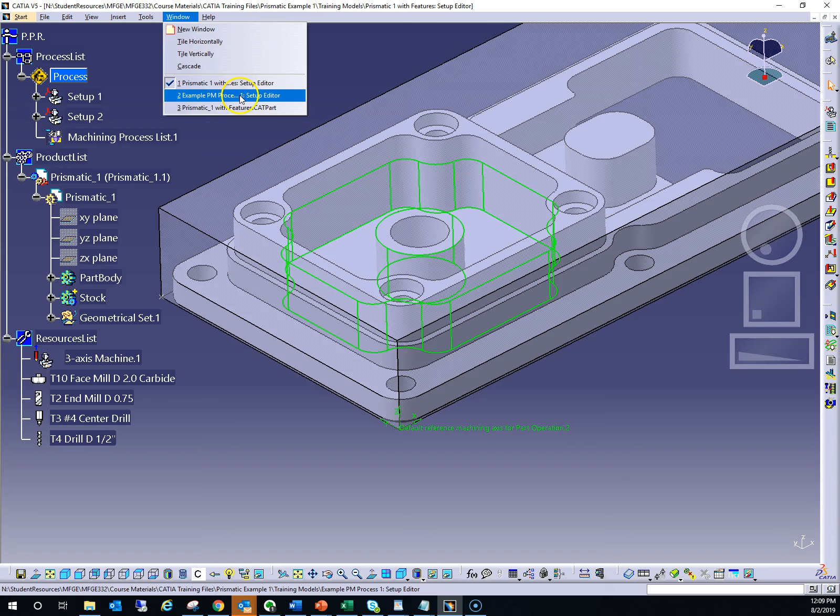So, as I did with the profiling and facing operation, I'm going to let you take a crack at that first, and once you're done, you can come back and follow along to see what I've done. There are a few things I'll show you that will help speed things up. So please go ahead and start working on that second pocket.

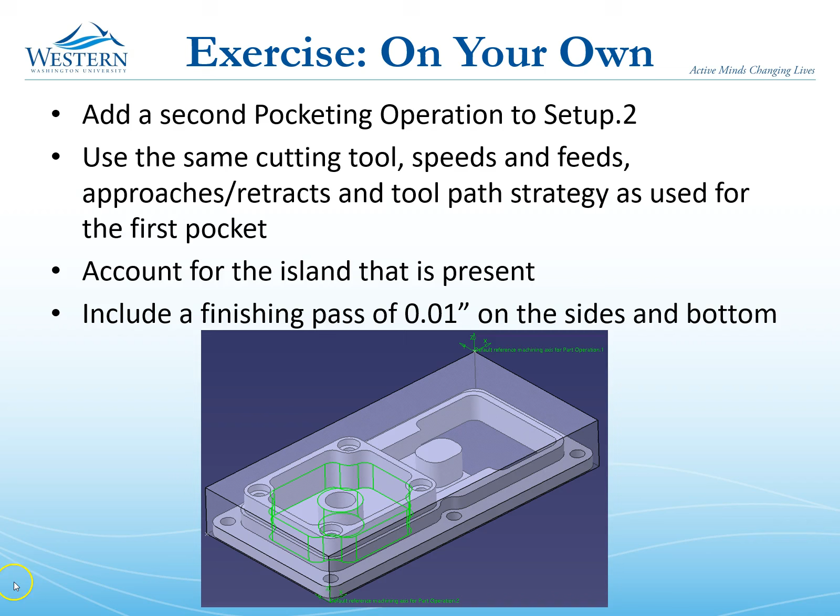Okay, I hope that went well. So I'm going to go ahead and do the second pocket. I'm going to show you a few tricks that you'll probably be upset I didn't show you before, just to speed things up. One thing you can do is copy operations.

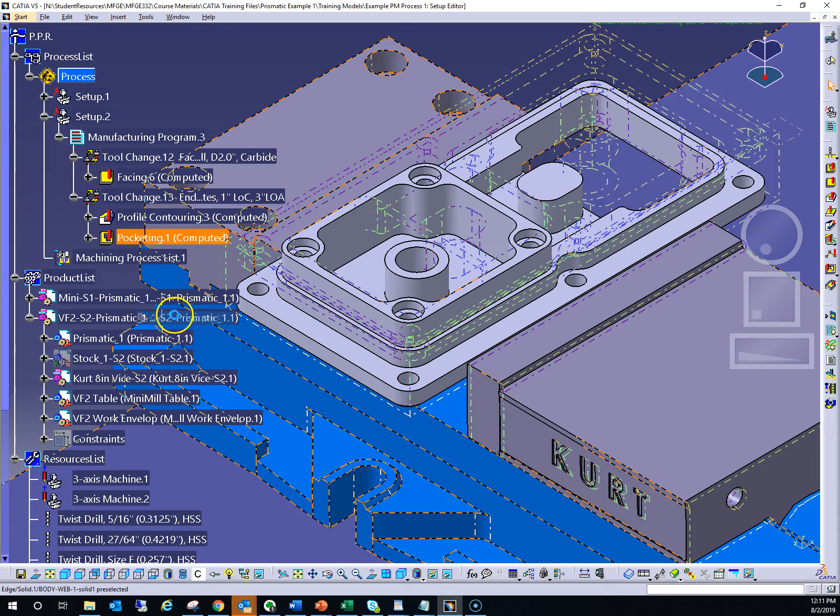So we have a pocketing operation here. Let's go ahead and right click and copy, then paste it right below. If I highlight, paste, I now have a second pocketing operation. Obviously it's exactly the same as the first right now, but it gives me something to modify.

So rather than building a pocketing operation from scratch, I can go ahead and modify an old one. In this case, because that pocket is directly below the one above it and uses a lot of the same geometry, I save a lot of time approaching it this way.

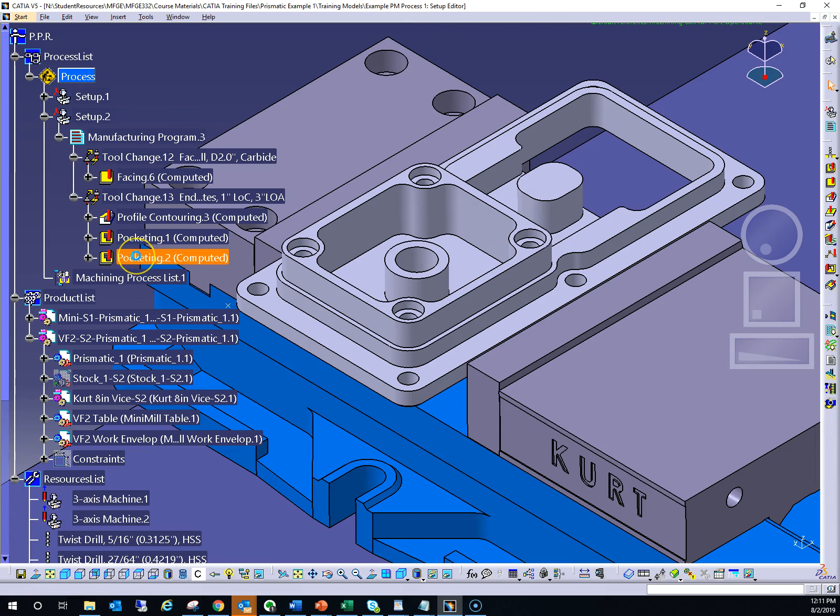So let's go ahead and double click on the copy, and go to our geometry tab. So what is different in the geometry tab? Well, there are a few things that are different.

First of all, the top of the second pocket is really the bottom of the first pocket, so we have to change that. And also the bottom is no longer the top of the island here—it's actually the bottom as we see it here.

So let's go ahead, right click remove, and reselect the top. Then I'm going to right click remove, and reselect the bottom.

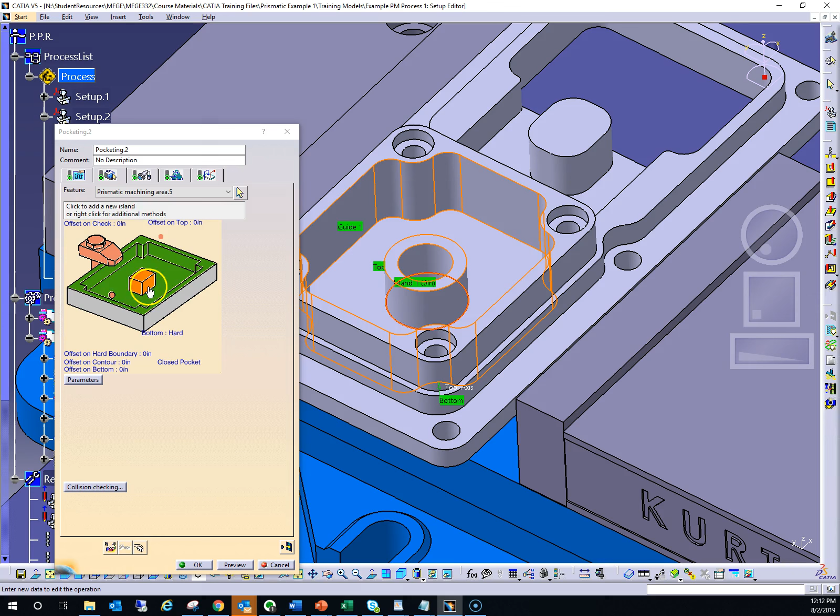Now notice that in reselecting the bottom, it also selected the island, which may actually be correct in this case. It says an island here has been picked, island 1. So we've solved that problem too, the problem of selecting the island, by reselecting the bottom.

So we're done with our geometry. Let's move over to our tool. We shouldn't have to change anything here since we just copied the previous pocketing operation, nor should we have to change anything with our speeds and feeds.

With regards to the retracts, again, since we copied the operation, everything that we set previously is as it was there. We may need to come in and play around with some of the ones that haven't been set, but let's generate the toolpaths first and look at it before we start doing that.

For our toolpath strategy, we're going to stick with what we've defined for the first pocketing operation. So outward helical, we're going to use the same radial step over strategy, 25% overlap. Axial, we're going to go down 50 thousandths, so to 21 levels.

For finishing, this is one place where we do have to change, because we do want to finish the side for sure, but we also want to finish the bottom in this case. So let's switch this from side finish last level to side finish at last level and bottom, and we're going to leave 10 thousandths on the bottom for finishing.

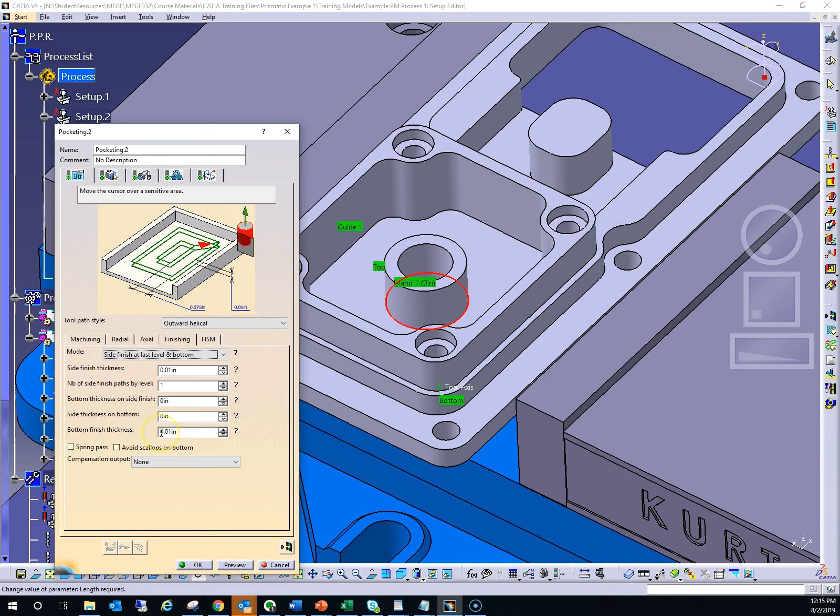Let's go ahead and generate the toolpaths and see what we've got. We should expect to see that we are machining around this island, which is correct, and we are machining from the top here, the top of the island, down to the bottom.

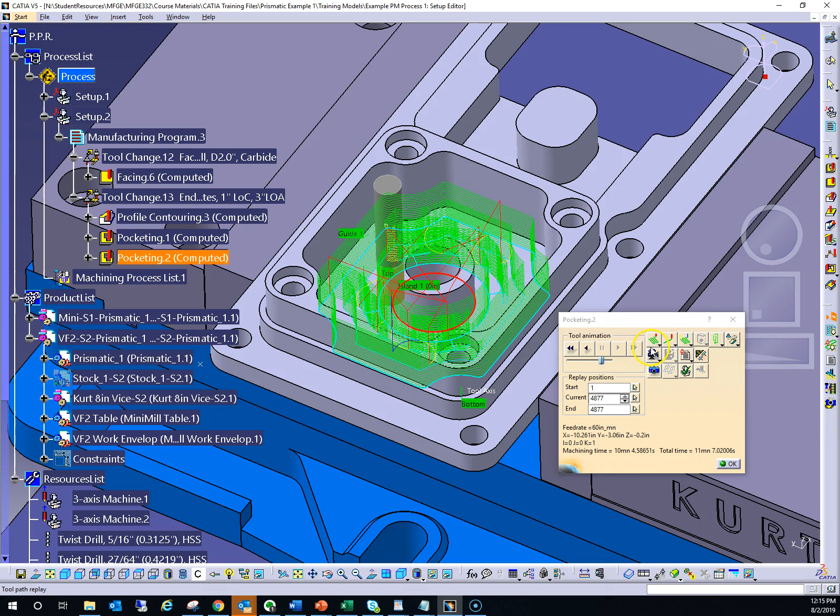Let's go to our plane by plane replay, and let's rewind to see how things get going. So this is the move from the last retract of the first operation to the start of the approach, and we see that we have a helical approach. That's still there, and then a really interesting looking toolpath.

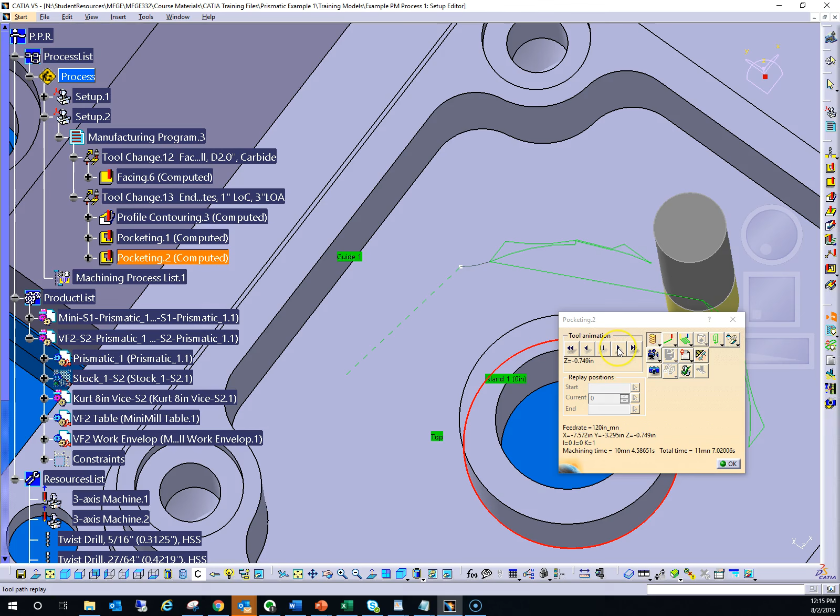Again, sometimes the toolpath generation looks a little bit strange, so the tool is doing some really strange moves in here. Doesn't mean that the result is not going to be correct. And then it does this repositioning move to this side of the part.

There's some other toolpaths, and as you can see, again, there are these strange looking toolpaths. So these repositioning moves are concerning me a bit, because the tool is jumping around quite a bit, and again the toolpaths look somewhat strange.

So what I'm going to do is hit OK here, and I'm going to see if I can come up with something that looks a little bit better, and where the tool is more consistently down and not jumping around so much.

One of the ways to do that is to change your percentage of tool diameter where the tool is in overlap. Right now we're at 10%. We can either reduce that or increase it and see if that improves the way the toolpaths look and reduces the amount of jumping around that the tool has to do.

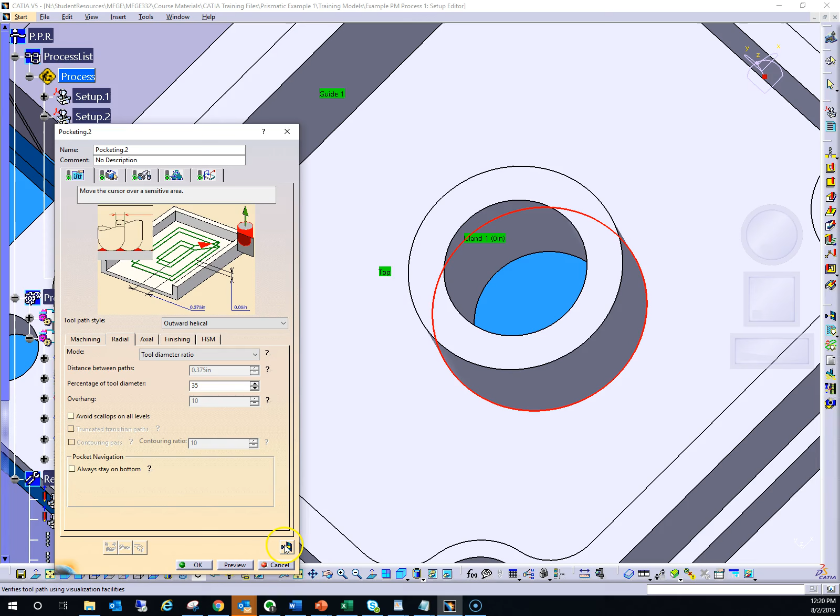So I'm going to bump this up to 35%, so I'm having a little bit more of an overlap. Let's go ahead and generate the toolpaths. This immediately looks a lot better, because I'm not seeing that red repositioning motion, or a lot of those where the tool was jumping from this side of the part to this side.

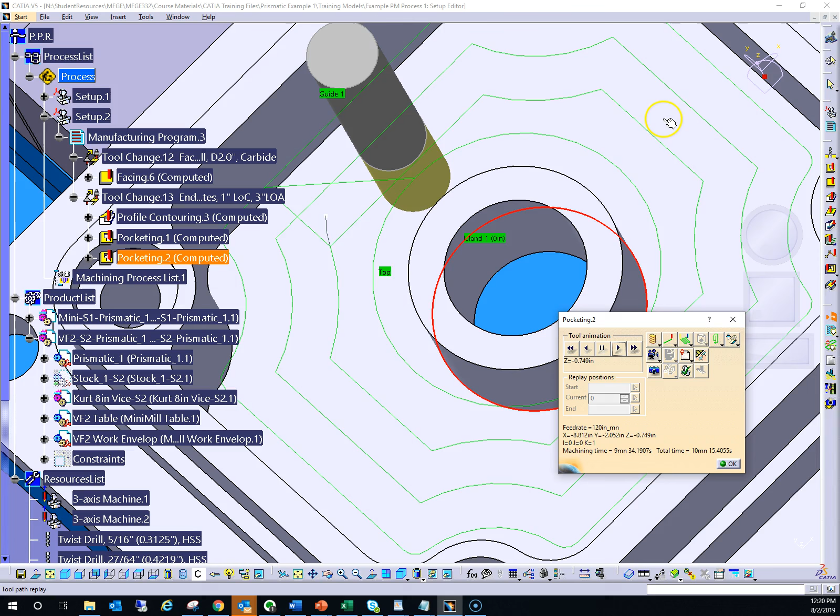Let's go back to plane by plane replay and step through. You can see now that the tool is pretty much doing a full connected region, whereas before it was doing those strange toolpaths over here, lifting up and jumping over and coming down on this side and doing more toolpaths. So it's reduced the amount of repositioning, which is a really good sign.

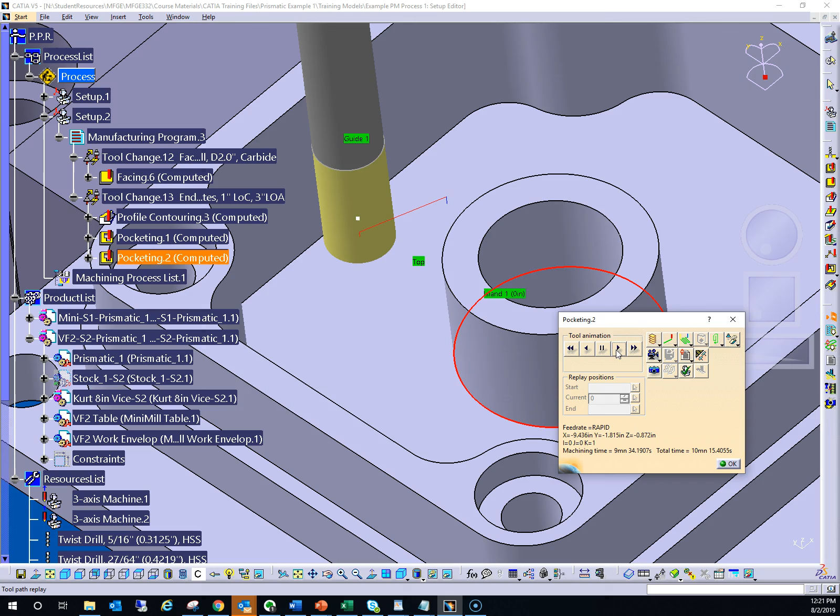We can see here's the lead-in, which is again a helical lead-in, following what was done in the first pocketing operation. We see the tool retracting, repositioning, helical lead-in for the next pass, and so on. This continues all the way down to the bottom.

So let's see what happens. I've done a replay all the way to the bottom, and then I'm going to back up one level just to see what's going on with the finishing pass. So there's a finishing pass here on the island, and when we say finishing, the finishing also applies to the island too.

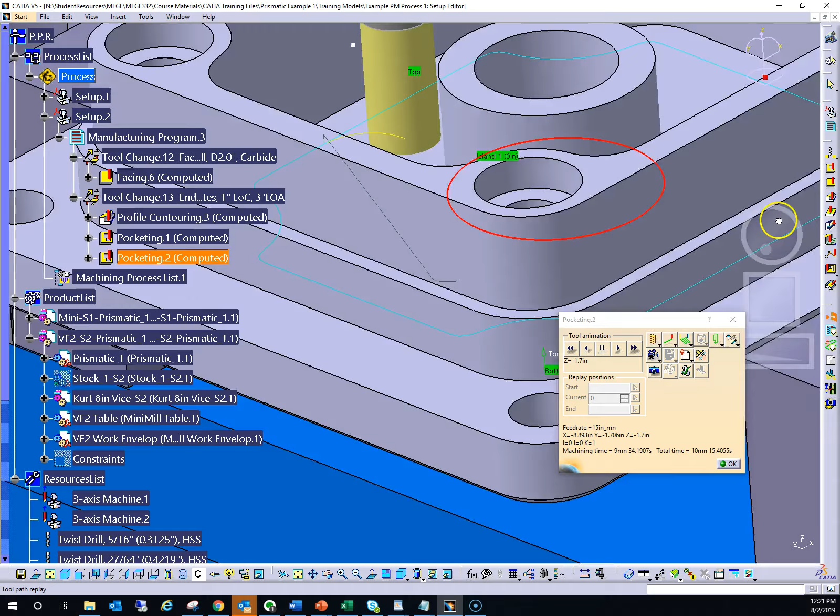This here is our approach. Here is our final retract, which is a circular lead out and then a retract up to the top of the part. And if we back up some more, we see this being the repositioning move, the actual move approach into the finishing pass on the outer profile.

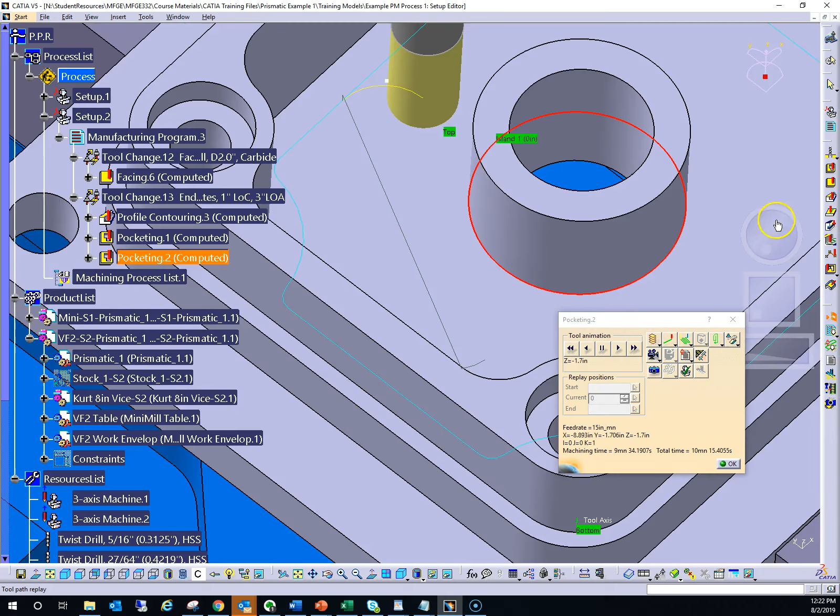And then this here is the retract, the rapid over, and then the approach move to the part of the finishing profile that goes around the island. So that looks okay. We will check it, of course, with material removal to make sure that the cutter, it doesn't look like it is, but that the cutter, when it does this rapid move here, isn't slamming into the wall of the part.

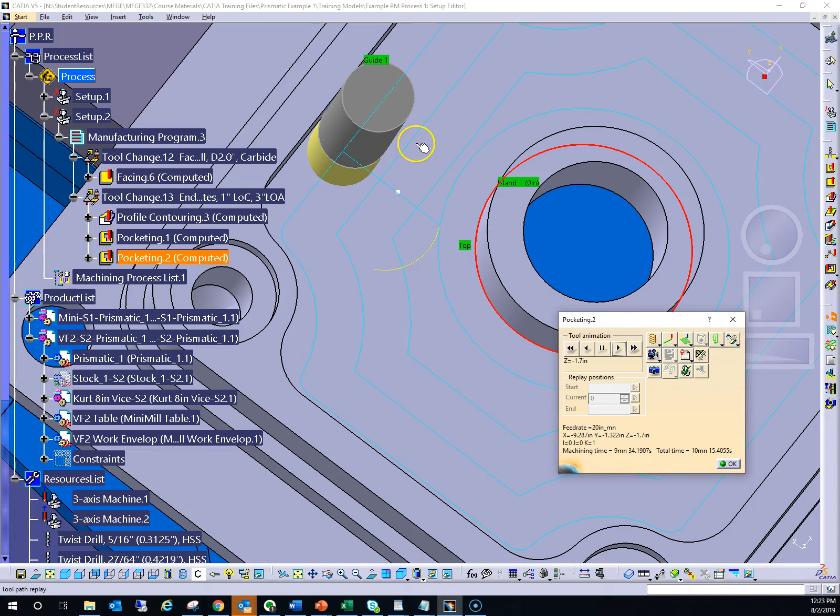And then we back up one more. This here shows the approach to finishing the bottom. So again, this here shows this is the approach for this pass. And then when it's done, the retract rapid, and then this is the approach to the finishing pass. Here, this finishing pass. So it looks like things are happening as we expect it to.

So again, this is the lift up, move over, helical, circular approach, and then we're doing the bottom. And then this is the rapid up, rapid out, so they retract, rapid out, helical lead in, circular lead in onto the pass on the outside.

And then when we're done with the pass on the outside, this is the retract move, rapid over, helical approach, circular approach, and then the finishing pass on the island. And here's the lead out, circular lead out, and then the final retract to the top of the part.

So you do need to spend time looking at your tool paths, and again, I think the plane by plane option is really a great way of helping you visualize what is happening to make sure that the tool is doing what you want it to do.

So again, if we go to the roughing passes, we see that here's your lead in, the green is your cutting. This is the tool where it stops at the end of the pass, and then there should be a retract move. Here it is, and then the repositioning, and then it's repositioning for the finishing pass.

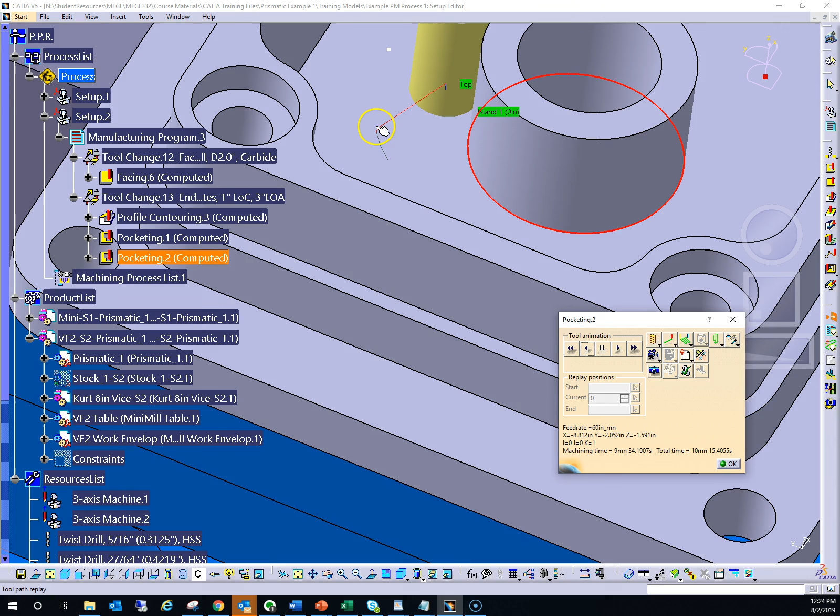And then between roughing moves, what we'd expect to see is a retract, a rapid, slight rapid down, and then a helical approach move. And then the actual machining of the pass.

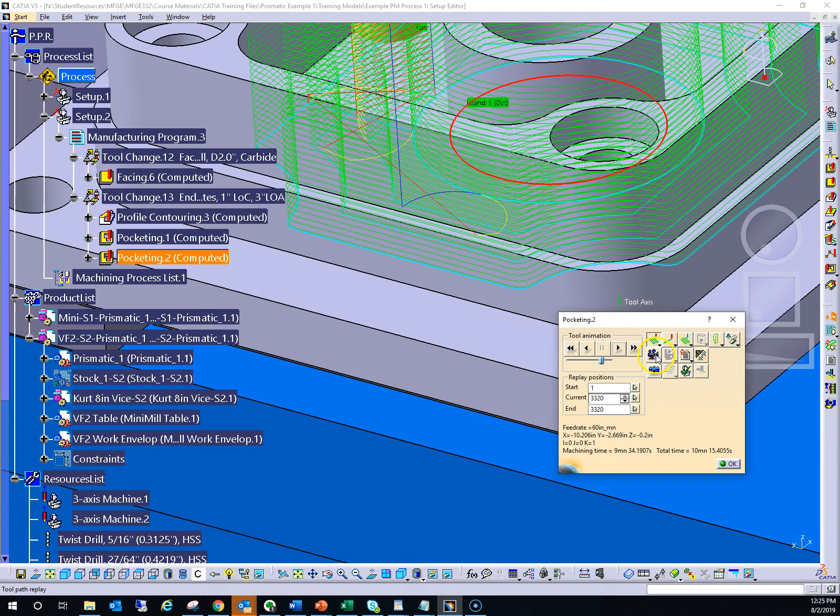So let's go ahead and simulate material. So let's change our replay mode to continuous. Let's go ahead and click on our replay. Let's go ahead and run right through. Let's see if we can stop it after the first pocket. So here I stopped it there. You can actually see the helical lead-in, the effect of the helical lead-in, the type of surface that's generated as the tool moves in. Slow it down a bit.

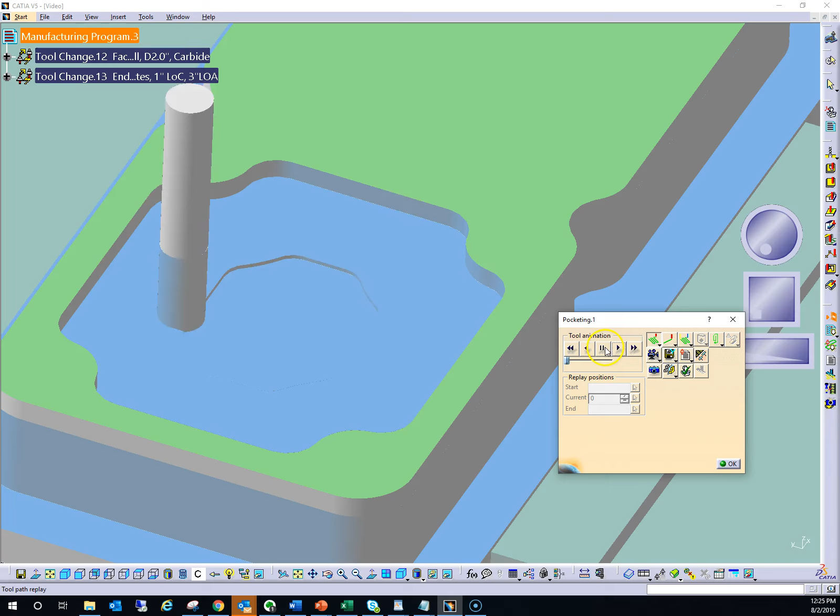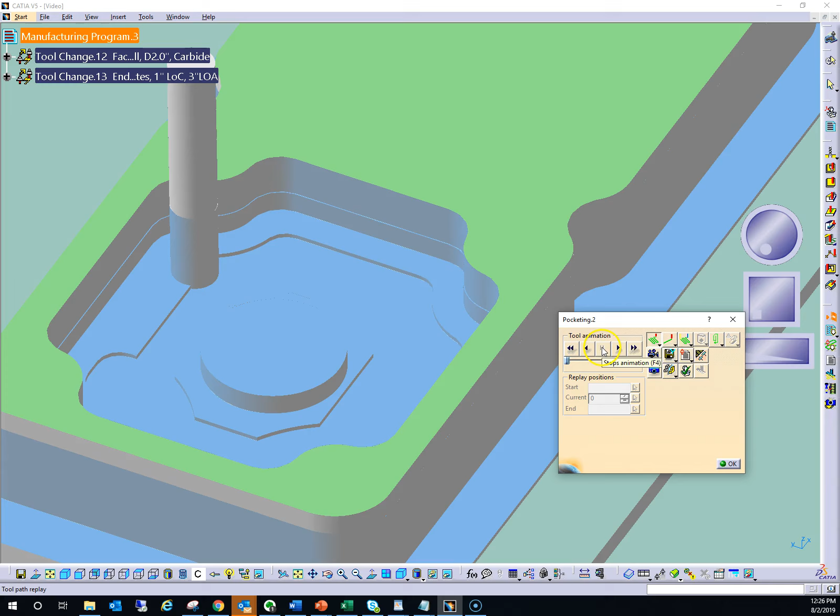Okay, so here we go. We've just started the second pocket. You can see the finishing material that's being left here. Because remember, we finished the top pocket, so this is 10 thousandths thick. That's what's being left there to be finished. Again, you can see that helical lead-in there, the effect of the helical lead-in. And there's our finishing pass.

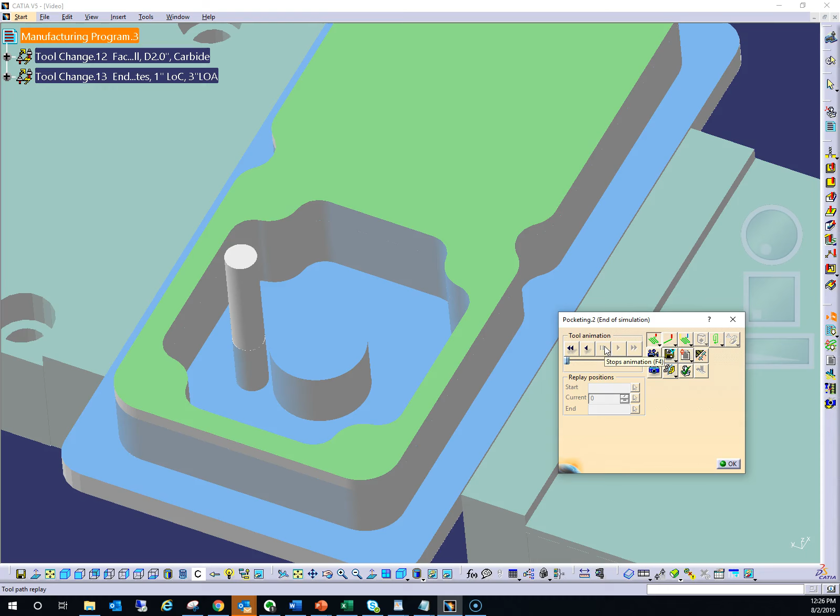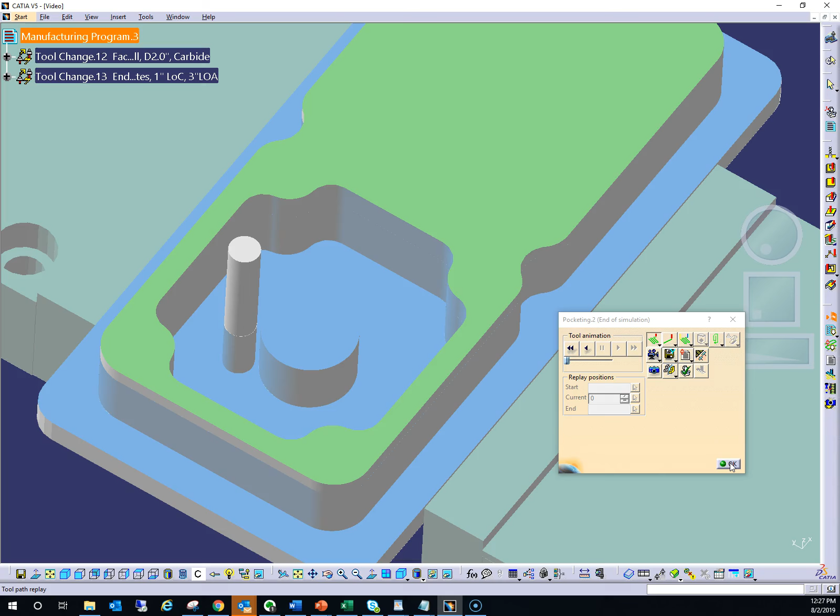So again, we can see in this case that there was no obvious collision between the tool and the work that left a gouge mark. Again, we've been following the rules that I said, which is to make sure that your helical depth is greater than your depth of cut. Again, we're using 25 thousandths in excess to make sure that we brake the tool or slow the tool down from rapid to the approach rate before the tool hits the interface of the material.

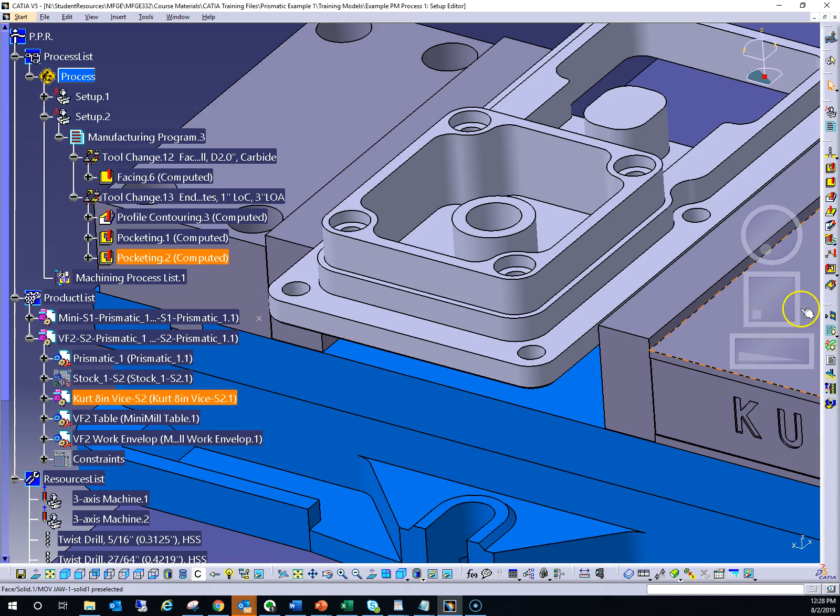So let's hit OK, and your tree now should have both of those pocketing operations, one on top of the other, following the profiling operation. So in our next videos, we will start looking at how to machine some of the pockets on this side of the part, some of which are open pockets, which present slightly different selections over a closed pocket. Do save your file before you move ahead.